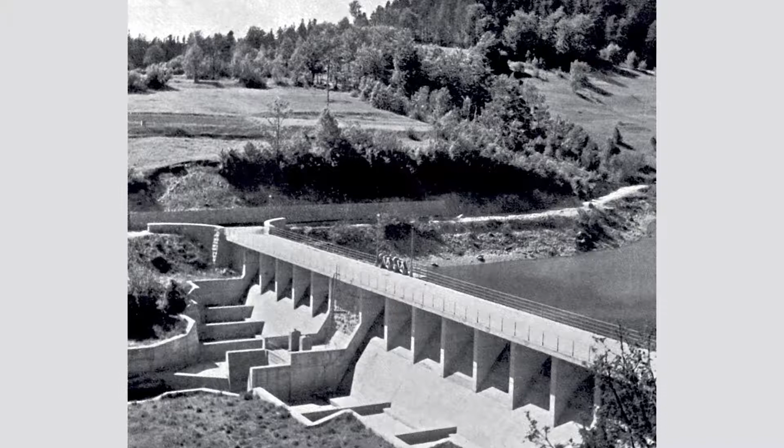The beginning of Elektroprojekt's activity was its engagement on the Vinodol hydroelectric power plant project. A team of Elektroprojekt's engineers and technicians developed the design documentation for the Vinodol and Zavrelje hydroelectric power plants. These were the first hydroelectric power plants built in the region after the Second World War.

Professor Dr. Mladen Zugaj made an indelible impression in the history of Elektroprojekt as we know it today. He initiated a systematic approach to multi-purpose water and land development utilization and hydraulic modeling. He is also remembered for pioneering a modern teaching approach to water power harnessing, large dams and hydrotechnical systems at the University of Zagreb.

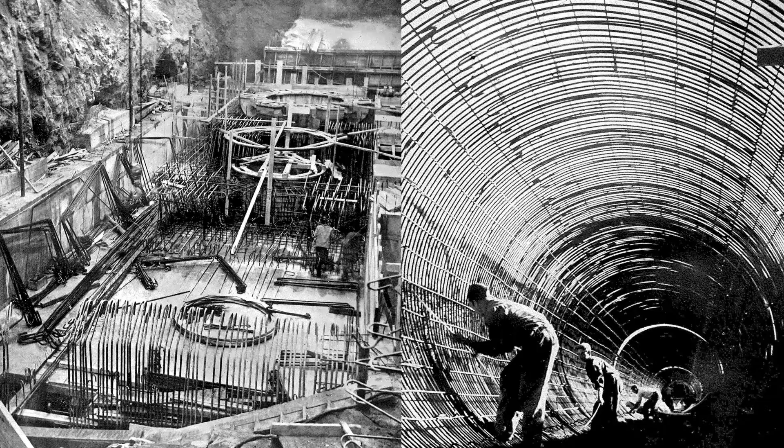Termo Elektroprojekt Zagreb and a substations design group joined Hydroelektroprojekt on the 8th of April 1951, and so the business operations program was expanded to cover the design of all power generation plants and facilities.

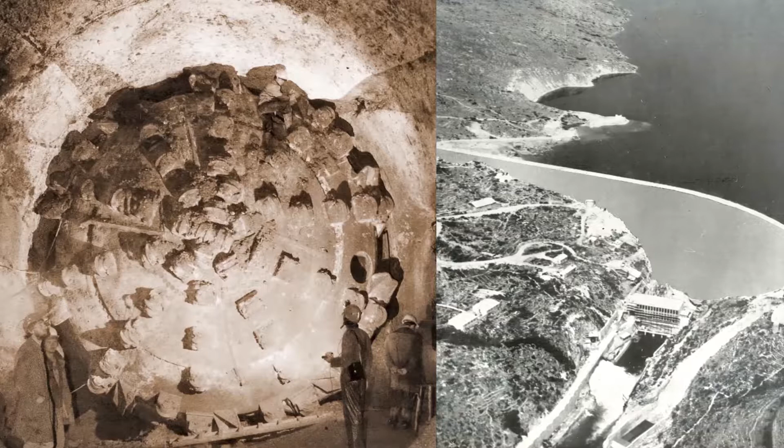After jurisdiction in the sector was passed from federal to republic administration level, the government of the People's Republic of Croatia issued a decision on the 6th of February 1952 to rename the company to Elektroprojekt, a company for the design of power generation facilities.

In order to improve the design of hydrostructures, Elektroprojekt built its own hydrotechnical laboratory which became operational in 1953.

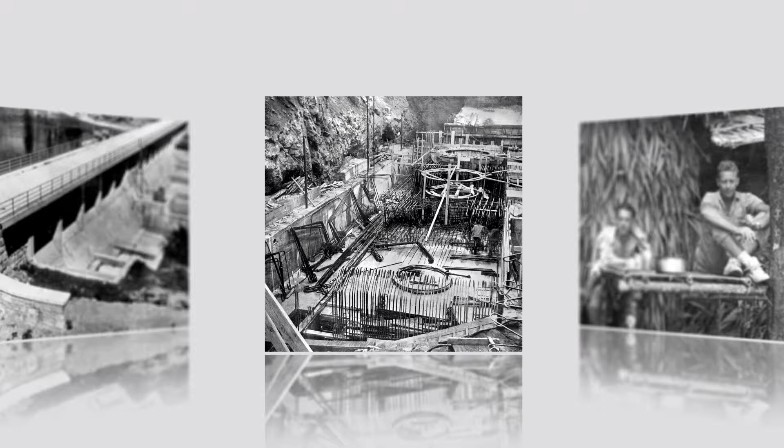Elektroprojekt entered the global market in 1954 by working on the Zorgai hydroelectric power plant in Myanmar. Since then, its international presence has been continuous and driven by customer demand. In 1957, the company expanded its activities to all types of hydrostructures and nuclear power utilization studies.

During its presence over many decades on 4 continents, in 28 countries, from the USA to Mediterranean Africa and the Middle East to New Guinea, the company has always endeavored to meet its clients' requirements. Elektroprojekt encourages accountability to local communities by providing technically reliable, efficient, economical, and environmentally sustainable solutions.

70 years of design challenges and engineering achievements of previous generations serve as an inspiration to the new generation of young people joining Elektroprojekt, who are being expertly trained to assume the role of their predecessors.

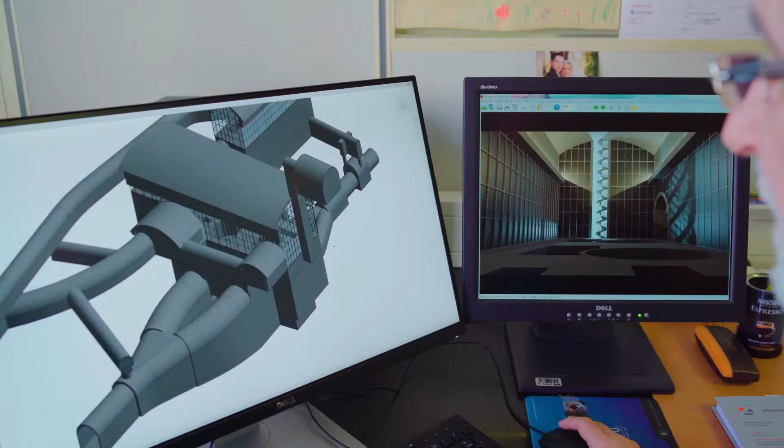Elektroprojekt is an engineering company of more than 90% graduate engineers of different technical backgrounds on its staff, qualified to perform design engineering and consulting tasks. Excellent education and adoption of new technologies are vital for the development of the company.

Our employees with master's and doctoral degrees work as professors, lecturers and teaching assistants at the University of Zagreb, Faculty of Civil Engineering, the Faculty of Science, the Faculty of Mechanical Engineering and Naval Architecture, and at Zagreb University of Applied Sciences.

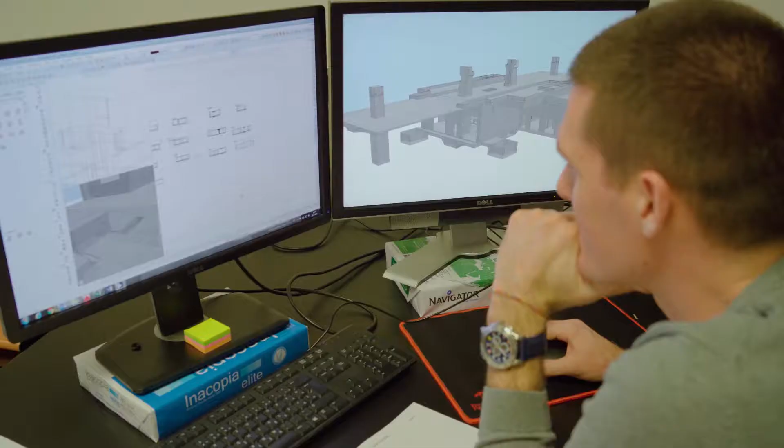Elektroprojekt provides construction, supervision and site organization services as well as the development of quality assurance and commissioning programs. For operating facilities, it prepares maintenance, repair and reconstruction documentation, develops programs and implements performance measurement and monitoring.

The company's products constitute a unique archive containing more than 23,000 design volumes, including design documentation for the majority of hydroelectric and thermal power plants and other facilities built in the Republic of Croatia.

Elektroprojekt reaffirms its commitment to excellence by regular recertification in accordance with the standards regulating the areas of quality management, environmental protection, and occupational health and safety.

Elektroprojekt has an expert team working continually on the environmental and nature impact assessment of the company's activities, which demonstrates the company's commitment to the sustainability of its design solutions.

One of Elektroprojekt's core activities is in power sector development. The company is participating in the design and construction of hydro and thermal power plants, power transmission and distribution facilities, as well as renewable energy sources and the implementation of energy-efficient solutions.

Design activities in the water sector include the engineering design of water management, flood control, land irrigation and drainage systems.

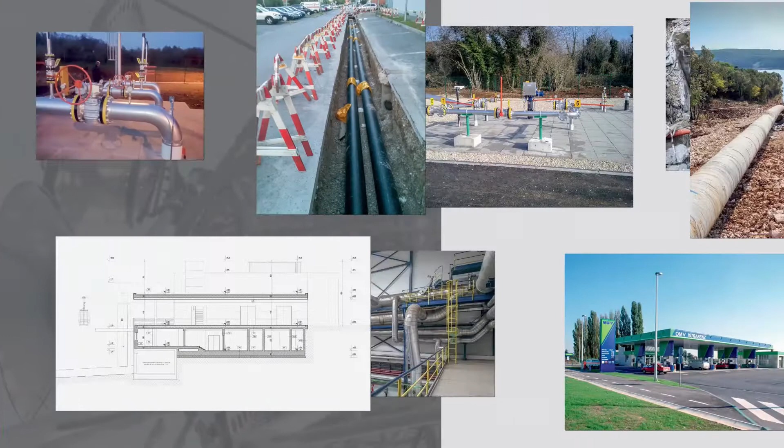Elektroprojekt develops designs for infrastructure and telecommunications facilities such as gas lines, district heating systems, water supply, sewerage systems, telecommunication systems, public facilities and traffic infrastructure.

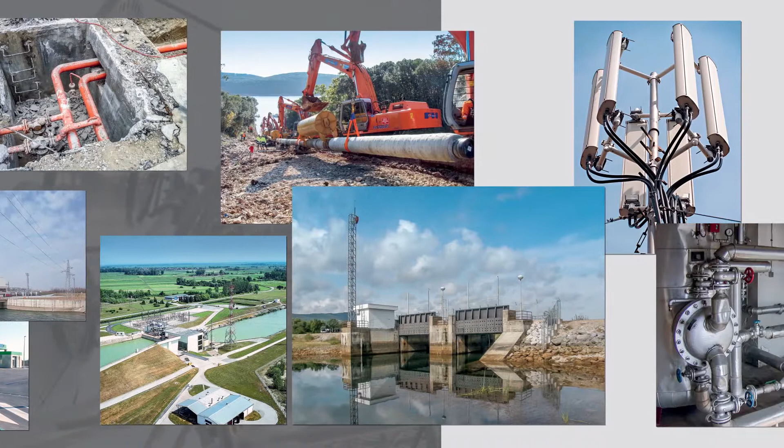Elektroprojekt conducts environmental impact assessment studies for various facilities and projects aimed at conservation of the environment and protected areas. In addition, Elektroprojekt also provides consultancy and monitoring services covering these areas.

In the 70 years since the establishment of the company, thousands of design documents have been developed for more than 50 dams and reservoirs, more than 820,000 hectares of irrigation and drainage areas, 114 kilometers of river training structures, more than 100 kilometers of hydrotechnical tunnels, 5 underground and 37 above-ground powerhouses for hydroelectric power plants, 27 thermal power plants

with a total capacity of 8,000 megawatts, of which 17 are in Croatia and 10 abroad, water supply systems with a total capacity of approximately 82,000 cubic meters per hour, 37 pumping stations, and an array of other projects in Croatia and abroad.

In all the stages of its development, Elektroprojekt has always responded to new challenges recognized by society as important for future generations.

Our mission remains the same today, just as relevant, important and inspiring after 70 years in business, bringing technology and construction together in harmony with man and nature to serve present and future generations.